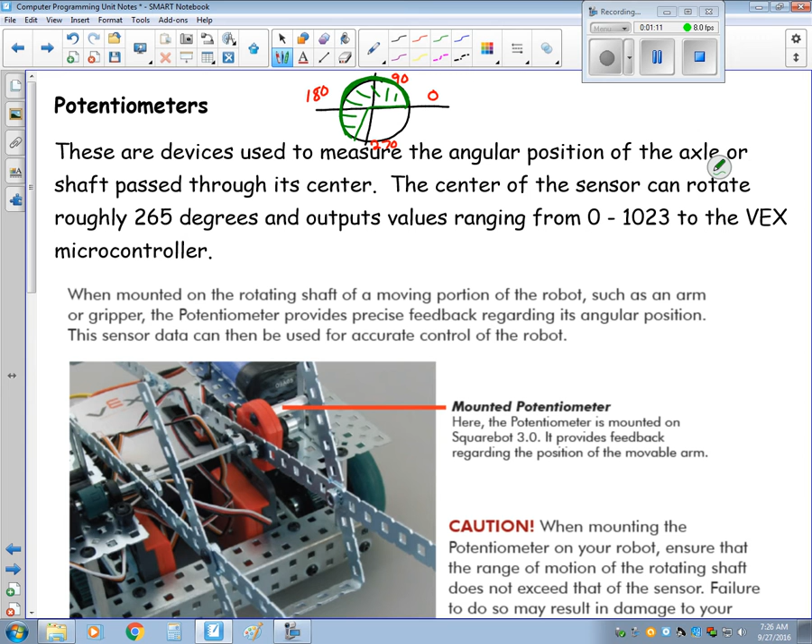So if I were to make a circle, since it passes through 265 degrees, we start off at 0, go to 90, 180, 270. So 265 would be right before 270. So this device can spin through roughly this part of a circle. And if we got our ranges in, since the 0 to 1023, these are just basically numbers. It's kind of like how setting a motor port equal to 127 would work.

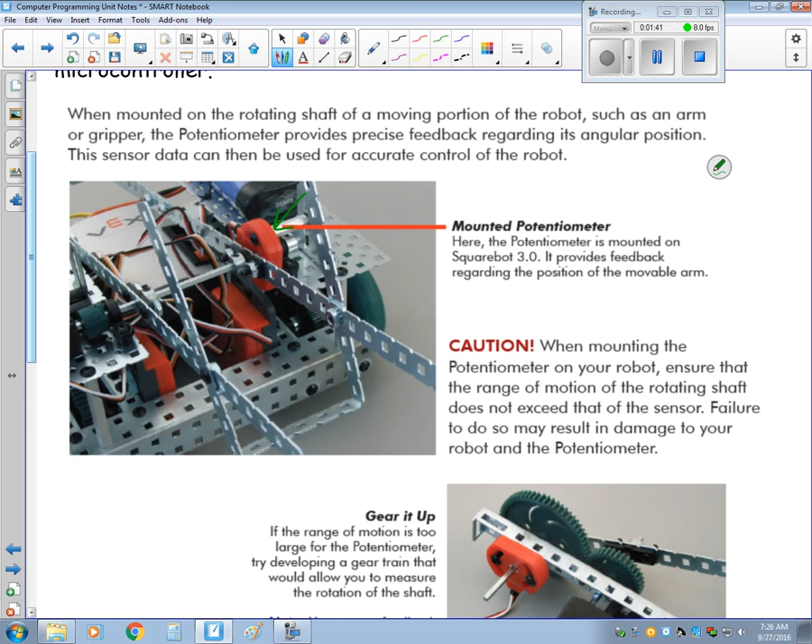So let's take a look at how this is mounted on the robot. Here we have our potentiometer, and we can see that we got a drive shaft going through it. Now again, these are not designed to make a full rotation, so you have to be careful when you decide to mount one of these. It's just for maybe half a turn rotation, something that's going to spin a little bit. And basically, the way this works is it provides feedback about the position of the arm.

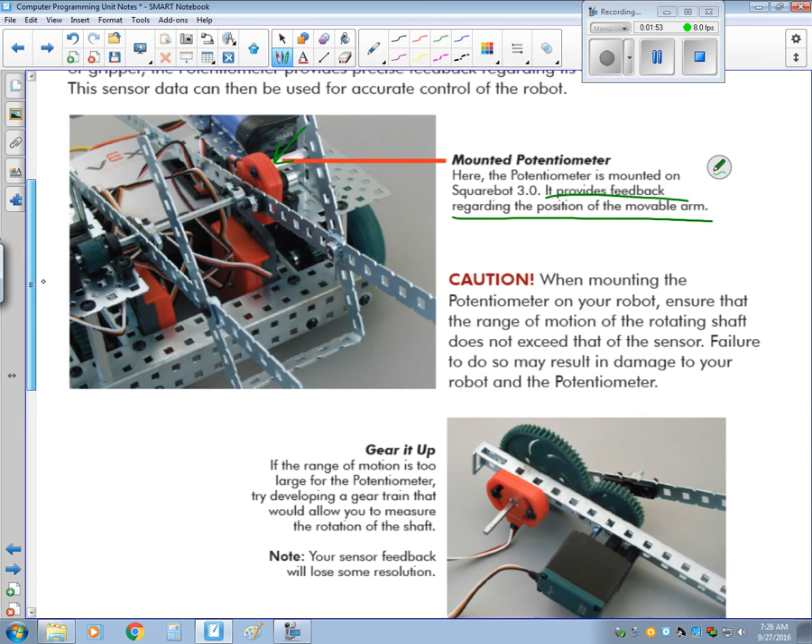And again, when you mount this, you want to make sure that you mount it in such a way that you don't break the device. We can then go through some gearing, and you can play around with how you have this mounted in different places. Again, just making sure that it doesn't go farther than a 265 degree turn.

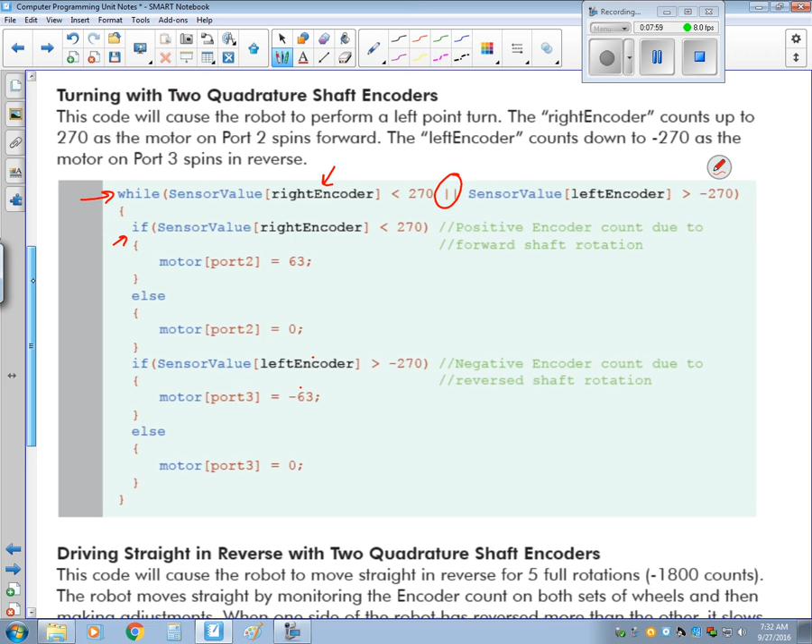Now let's say we want to drive straight in reverse. So for this code, it's going to make 5 full rotations. Now, if you take 360, multiply that by 5, you get 1,800. So you can start to do a little bit of math like this, thinking how many 360-degree turns do you want to make? So 360 and then just multiply by 2, 3, 4, 10. So to make 10 rotations, it would be 3,600.

So this robot's going to move straight by monitoring the encoder counts on both sides of the wheels and then make adjustments. When one side of the robot has reversed more than the other side, it slows down the speed and speeds up the other to correct the movement to keep the robot moving in a straight line. So this is an example of using the encoders to drive in a perfectly straight line.

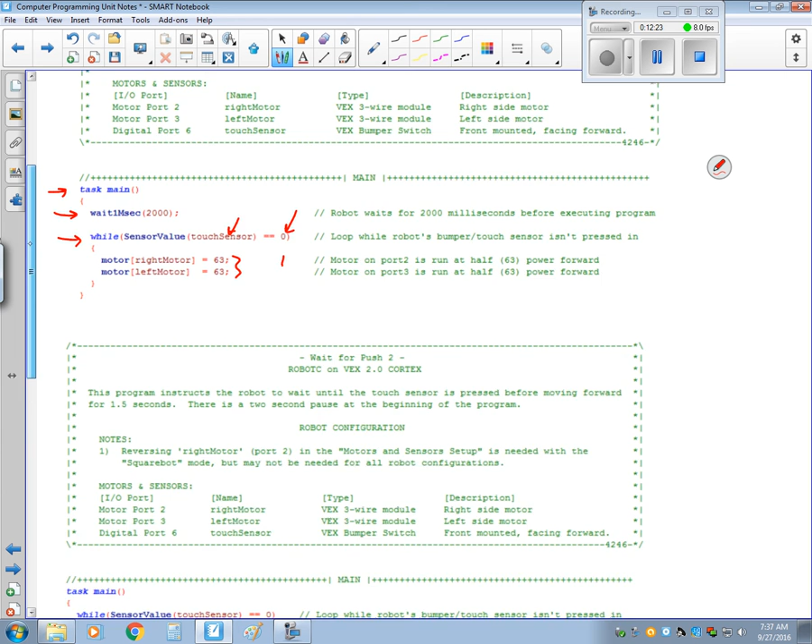Here's another one. This one is to wait for a push. So in this one, the robot is waiting for the touch sensor to be pressed. And then once it's pressed, it's going to move forward for 1.5 seconds. So again, we're going to have a while statement, a while loop. We got our main task here.

And while this sensor value equals 0, in other words, while it's not pressed, the robot's doing nothing. However, once this becomes a 1, once that switch is pressed, remember switches give us a value of 1 or 0, once this statement becomes false, then the compiler moves on to this next line, which has the robot move forward at half power for 1.5 seconds.

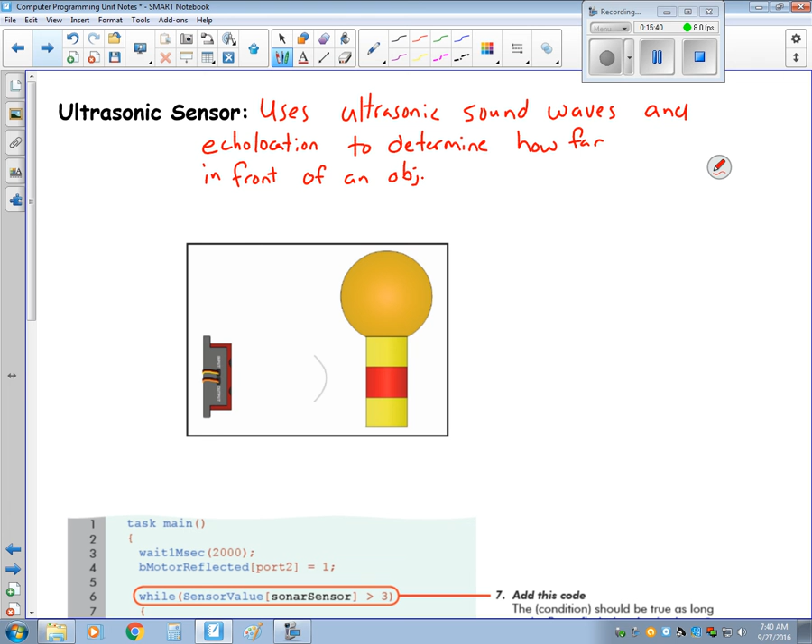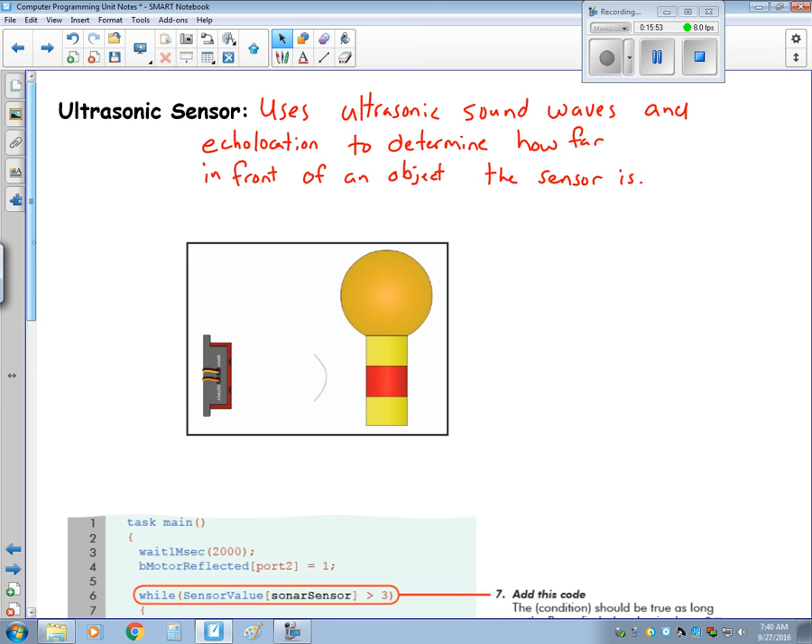So here's an example of this. There's an object in front of our sensor. The sensor sends out these sound waves that travel, bounce off, and return to the sensor. And using this data, the robot can tell how far it is in front of some sort of object. So let's take a look at the code here. We've got our main task. Again, this one just has some breathing room, a 2-second delay before the program kicks in. This just reverses the polarity of motor port 2. You can do the same thing by putting a negative in front of it.

And this is actually pretty easy code, using the while loop. So while the sensor value, and then whatever port it's plugged into, is greater than 3. So in other words, while that sensor is more than 3 inches away from an object, the robot moves. Once this while statement becomes false, so once it gets less than 3 inches away, the motors will turn off.

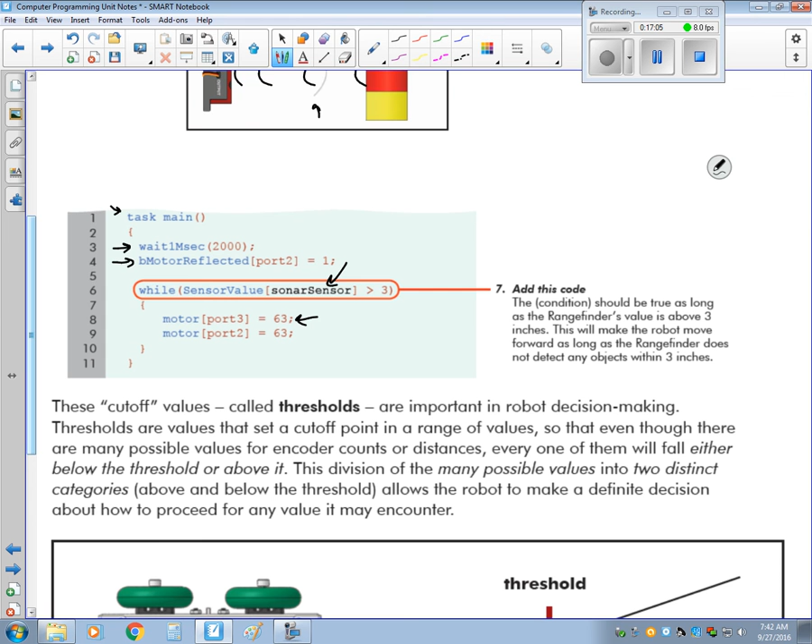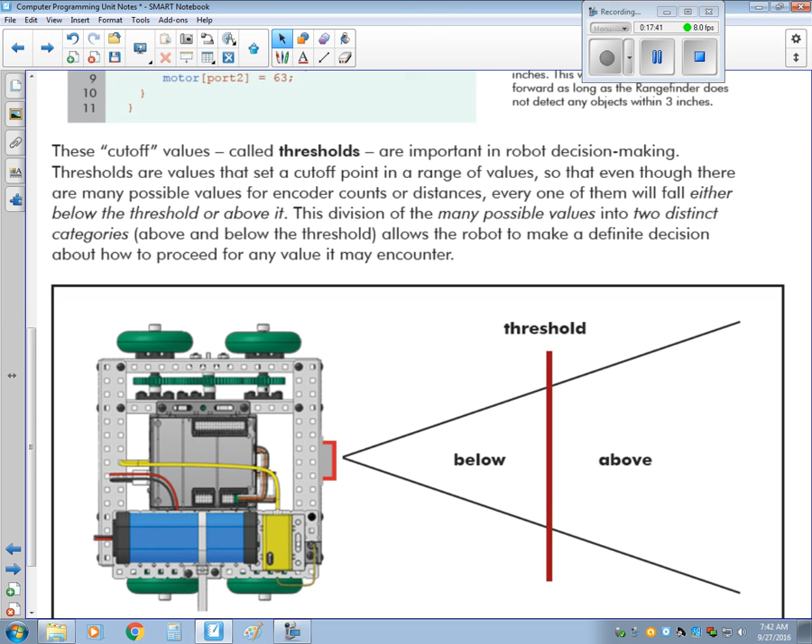Now, these sensors do come with limitations called a cutoff or a threshold. And basically, even though there are many possible values for the encoder counts or distances, they'll either fall below or above that threshold. So in other words, you can be too far away from an object and the robot wouldn't see it with that ultrasonic rangefinder. So you have to be careful about using these. And also, you want to be careful about the type of object that you're trying to see. If it's a thin pole, this ultrasonic rangefinder might not find it.

All right, that's going to conclude this unit's worth of notes.